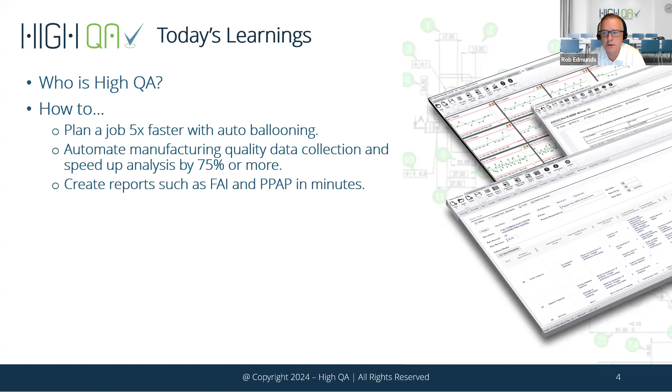We'll demonstrate how we can automate data collection, so getting those inspection results in real time. So now you have the ability to analyze all of that data quicker. Bottom line, it's real time, so it's at your fingertips. And then lastly, of course, we've got data back in the system, let's be able to report against it. So whether it's an FAI or a full submission packet, we're going to show you how we can save significant time getting that reporting out.

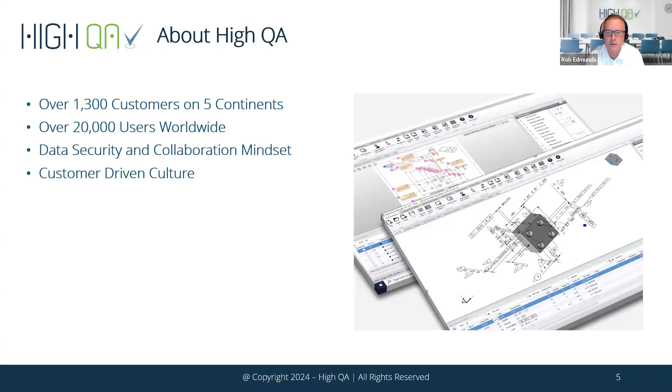A little bit about High QA: over 1,300 customers globally, over 5 continents. We have over 20,000 users. Big thing for High QA is data security, but also with that, having a collaborative mindset. So let's break down some walls. Let's pull manufacturing and quality together. And then lastly, we're realists. We understand your success is our success. So we do have a customer-driven culture.

High QA is really reimagining quality manufacturing management. So pulling a system into an all-in-one database where you can plan your quality, you can capture inspection results and then report against it. And with all of that, that ensures that you're on time, on quality, on budget.

Like I mentioned, High QA is an all-in-one database-driven solution. So we're eliminating those silos of data that aren't connected, and we're pulling it all together into one database that in itself can also integrate with other systems you may have, ERPs, PLMs. So with no further ado, let's jump into the product and we'll give you a look-see at High QA.

Lisa, can they all see the High QA software? Yes, I can see it. Perfect, thank you. All right, let's get started.

We're going to start from a wizard. And the reason I'm doing this is it's going to allow me to establish some defaults up front for the system. And when I say defaults, we establish what are called part categories in High QA. So think of this as an area where for a specific customer or for a specific part type, I can establish defaults throughout the High QA system, whether it's simply how I want my balloons to look, colors, sizes, all the way down to what reports are required in my submission packet. So I'm setting all those defaults up front.

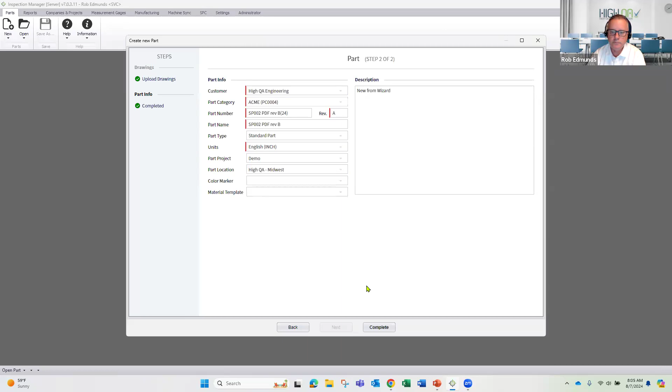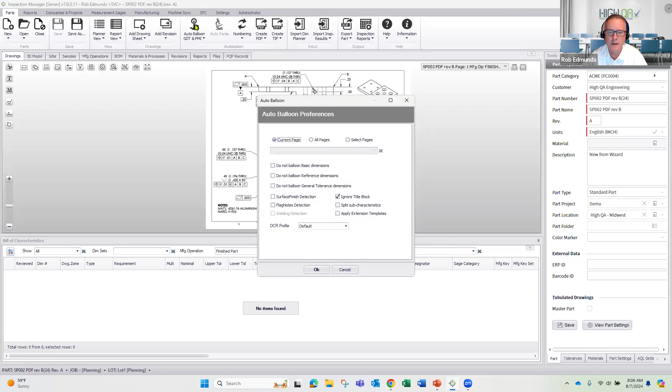All right, so I've pulled in our 2D print. We also work with 3D models, so either or. But to get started, all we're going to do is come up here and hit the auto balloon. And do note, we can handle multiple pages. If you have a packet where you need to select certain drawing pages, you can do that. You also have the ability to turn off certain things. Maybe I don't need to balloon reference or basic dimensions. I can turn those off. But we're going to hit OK.

And what that's going to do is engage our OCR. So the OCR is the optical character recognition software, something that we developed on our own. It is ours. It is proprietary. I always jokingly say it's not patented. We don't want anybody to steal it. It's the best OCR on the market, bottom line.

So once I've engaged that, it's determining the border of that picture. And then once it's done that, it's going through and finding all of the GD&T, all the features on that picture. It's ballooning it, but more importantly, it's also taking that through a digital transformation, right?

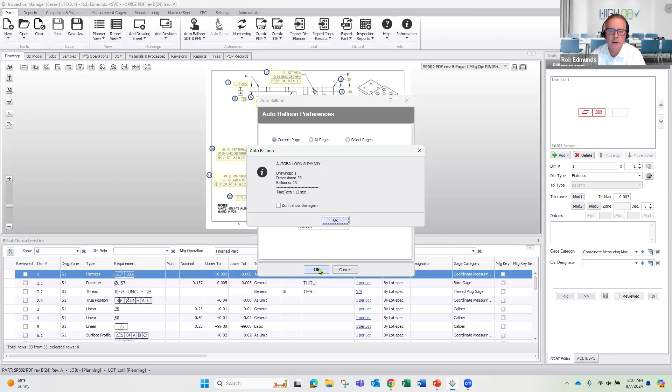So we're working with a picture, but once the ballooning process is done, now I've got executable data in what we call our bill of characteristics. So as you can see, in 12 seconds, we've got 33 dimensions, 23 balloons, and a complete bill of characteristics, right? So I now know every dimension, what type of dimension, the requirement, what are my tolerances on that dimension.

And like I had mentioned early on, I set some defaults. So one of those is my sampling rule. I've established my sampling rule as 1 per lot. And again, it could be anything. It could be AQL based. I also have the ability to establish default gauge categories based on the type of dimension. So as you can see, every linear dimension, I'm going to use a caliper.

Now, keep in mind, this is just a category. It's not the exact gauge I'm going to use. But every true position, I'm going to use a CMM. So that's all been established. Again, saving me time. I've already started to establish my inspection plan.

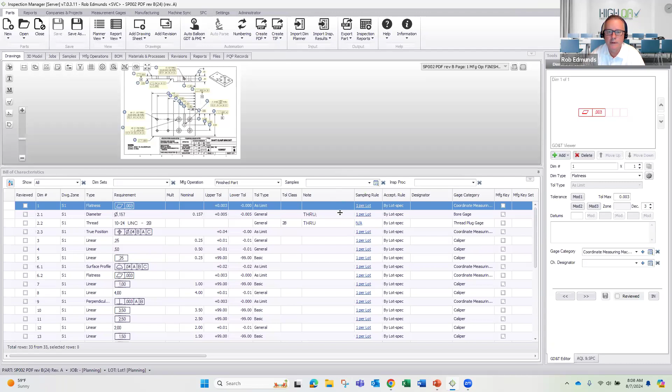Now with High QA, we provide you many tools so I can continue to use the OCR to capture additional information off of this print. So for example, when I brought in this part, it doesn't know the part number or name, it's just using the file name. But I can use these utilities around the drawing window to capture that additional information. So you could come up here and, hey, I want to extract information off my title block. I just go ahead and select that utility, and then I'm just box selecting the information using my mouse, and you'll see things update over on the right.

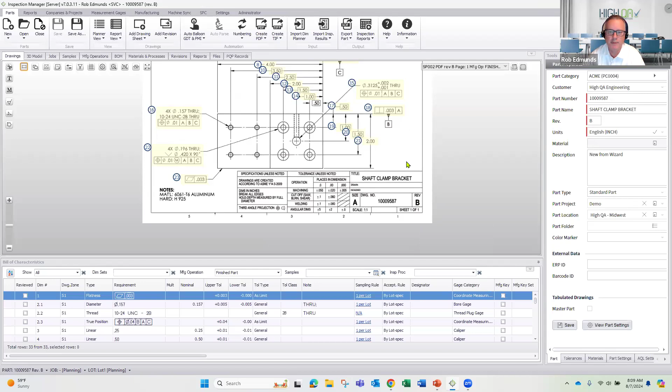So now I've got my part name. I can come in here, let's grab the part number. Let's even grab the revision. So the nice thing about this is not only am I getting the information in quickly, but I'm also getting it in accurately. I could have typed that in, but for those that know me, you don't want me typing. I'll fat finger something, then we've got incorrect data in the system.

For those of you that need to balloon notes, we provide you utilities so you can do that. Now, by default, we're not going to auto balloon notes because there's no standard around notes. So we give you this utility so you can simply come in, you box select your note, and you'll see it parse the information over on the right. But it also is now included in my bill of characteristics, and it's in there as a pass-fail. So it's going to be on my inspection plan.

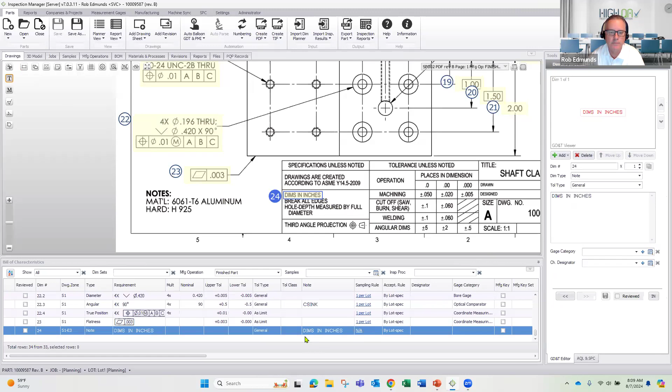For those of you that need to track material, we also provide you utilities so you can capture the material requirement off the print. And again, just box selecting the information, and you can see it now changed over to my materials and processes. So now I have my aluminum requirement in the database. Now, anytime you see a pencil within High QA, it just gives you the ability to drill in to where I can add additional information. The material code, maybe I've got a spec number. Maybe I want my supplier.

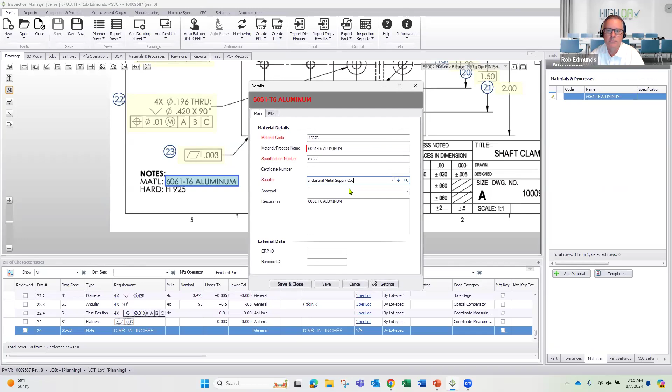But more importantly, how about being able to upload the material cert into the database so it'll flow to my reporting? I've got a sample material cert here. Let's go ahead and get that into the database.

All right, I already bragged a little bit about our OCR. Let's pick on one of these. So as you can see, Balloon 16 has 3 different callouts, right? It's got diameter, thread, true position, and you're seeing that in the bill of characteristics, diameter, thread, true position. But also there's a multiplier, right? Because there's 4 holes, and you'll see that in the bill of characteristics as well. So at the end of the day, we're looking for 12 results, right?

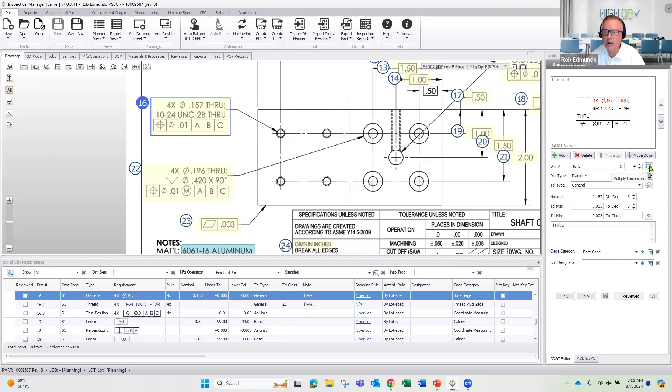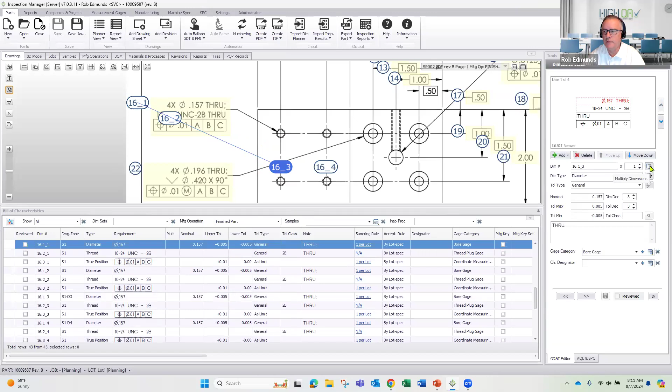Now, for those of you that run into a scenario where, hey, your customer needs you to identify each hole with its own unique balloon, we have that capability, and all I need to do is multiply out the dimensions. And now I have unique balloons, so I can identify each individual hole. And you'll see down in the bill of characteristics, now that we've done that, now we have all 12 lines. Okay. Now, for those of you that have that requirement and the print has 50 balloons, I apologize, because that becomes a very busy print.

All right, a couple more things to jump through here. For those of you that get drawings in a unit of measure that you don't want to work in, say I want to work in metric, but I'm getting this print in inch, right?

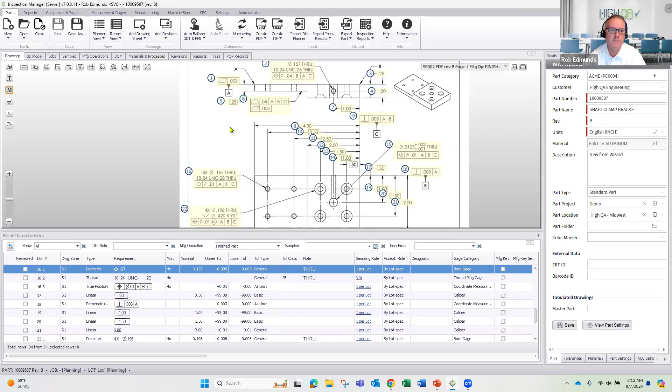Which is the default that was established before I ballooned the print. Well, if I need to see this print in metric, it's just a matter of clicking on the opposing arrows. Now the print is in metric, right? So I do have the ability to toggle between the units of measure. I can establish a plan in one unit of measure, collect the results, and then toggle back to the customer's unit of measure that they provided.

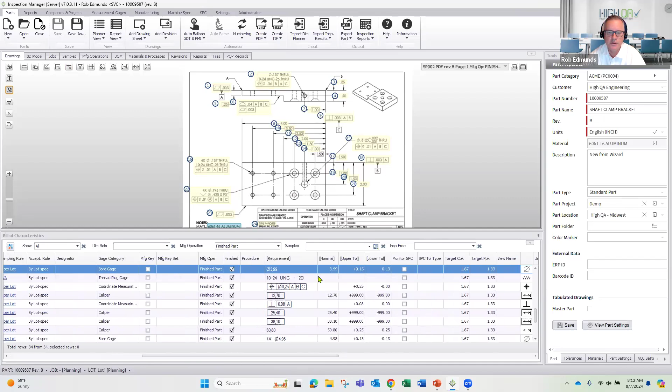And again, that's not smoke and mirrors. It's not doing the calculation when I hit the button. Actually, if you remember that first, whatever it was, 15 seconds when we ballooned the print, here is the default, which is an inch. But if I scroll over in the bill of characteristics, the conversion was already done, right? So there it is in metric.

All right, so here's another nice feature, right? We'll never claim we're going to be 100% on ballooning prints. Prints get busy, things get stacked on top of each other. The human eye has a hard time figuring it all out. But we provide you a utility called whiteout balloons. So when I click on this, it's going to eliminate everything I've captured, right? If I hover over, you're going to see them.

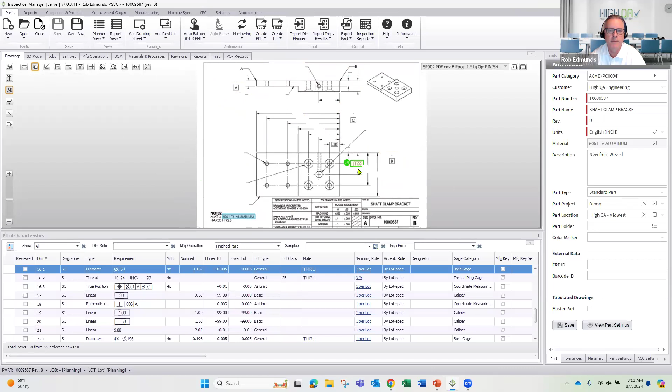But now I can easily identify, hey, we missed this dimension. And it's just a matter of grabbing the snipping tool. And now I can come in and I'm just going to box select it, let the system parse it out. It's going to determine, hey, it's linear, it's a basic dimension, 0.5. Perfect.

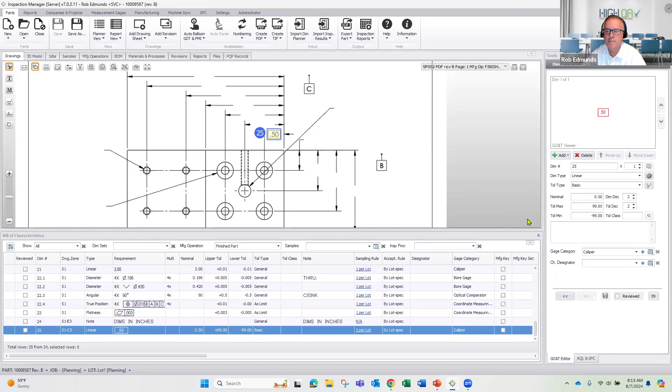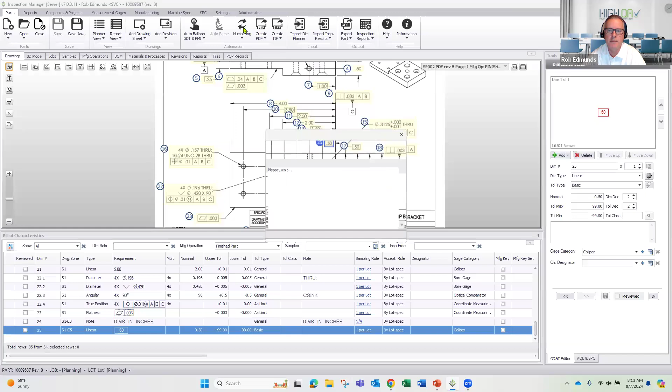But for those of you that maybe manually balloon today, this is probably one of your worst nightmares, right? Because now I go from 13, 14, 15, 16, 25, 17, right? I'm out of sequence. But with HighQA, very simple, just come up, click on the numbering, it'll renumber and put it back in sequence.

Another thing to note within HighQA, we talked already about a default gauge category, but you can also establish characteristic designators within the system. So let's say this balloon 22 is a key characteristic or a critical quality, right? We'll call it a CTQ. So when I hit save, a couple things are going to happen based on rules that I've already established in my system. So one of the things is I have my balloon simply changing to a triangle. I want it to look different on the print. It is a CTQ. Let's pay attention to it.

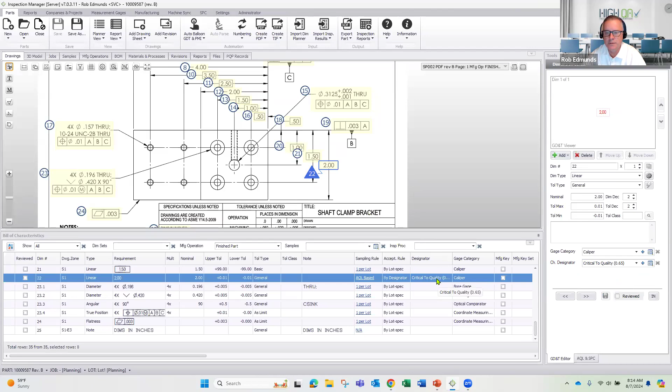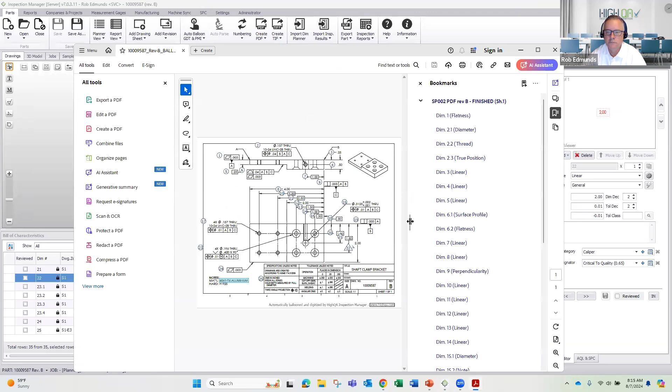But also notice down here, now that it's been established as a CTQ, I've got a rule that says anytime I have a CTQ, change the sampling plan to be AQL based. So those two things happened automatically. So that simple, guess what I've got now? I've got a ballooned print, but I also have the ability now to create my inspection plan.

So I know every dimension, the requirement, the tolerances, what measurement tool I need to use, and even the ability to capture actuals within this inspection plan and re-import them once it's done. So that would be the most basic way to get results back into HighQA, but we're going to talk more real time as we move through this demonstration.

All right, really quickly, I want to jump into our gauge management. So gauge management is in the core HighQA system. Of course, we're going to track all the information you would expect, right? All the gauge information. We do have the ability to track location of gauges if you're using our shop floor data acquisition interface that has check-in, check-out capabilities.

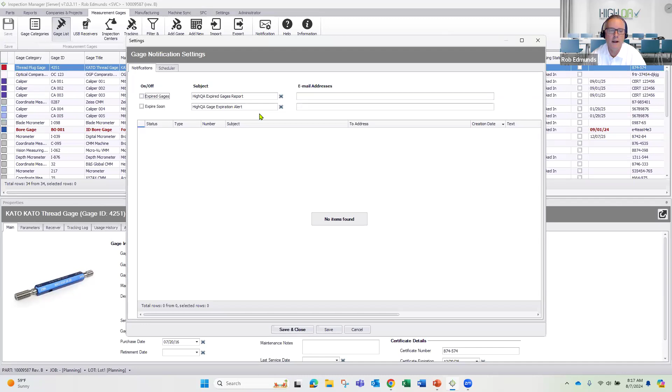All right, let's jump back over here. And I'm sure many of you do in-process inspections. So that's where we're going to go next. I'm going to go into an area called manufacturing operations. So all these different dimensions are associated with the finished part, but this is where I could start breaking things down into different operations, right?

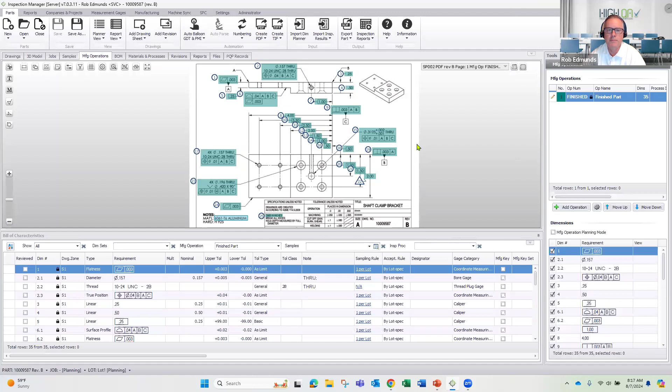So let's say I'm starting with my block of aluminum and I'm going to rough out that part. That's my first op. So I'm going to come in here and I'm going to select some of these dimensions. Let's just grab some of these overall dimensions. We'll grab the height here, and we're going to add an operation. So now I can come in and say, hey, this is my roughing op.

Now, for those of you that are doing submission packets like a process flow, a PFMEA, control plan, this is where we can start associating the process to the operation. And those reports will now be dynamically generated based on the choices I'm making, right? The reports are already established, but now I'm going to dynamically populate them through these different steps in my planning process, right? So I'm going to go ahead and I'll grab my roughing process.

Now, within HighQA, we have what is called a process library. So it'll define all the different processes in your organization, but also it'll maintain the failure modes for each one of those processes. So we've templatized that. So as I start building this out, my process flow, my PFMEA are all getting populated based on these choices I'm making. Let's grab a couple more.

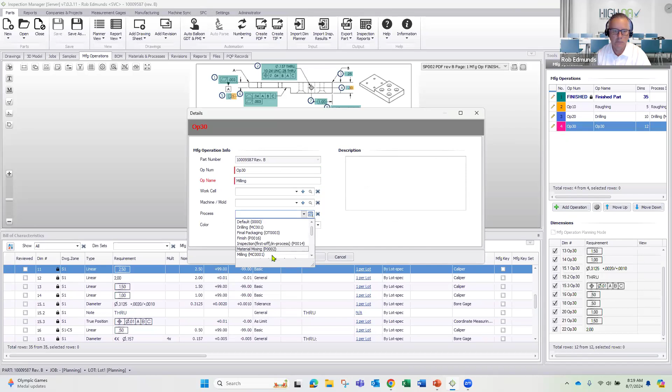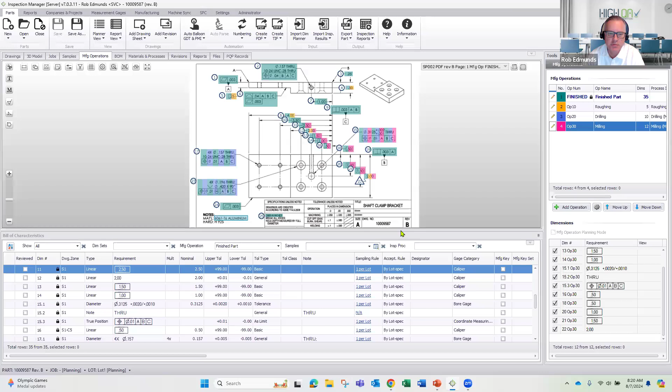All right, so now we've got our Easter Bunny print or Candyland print, whatever you want to call it. By the way, you do have complete control over the colors, but we've got our 3 different operations established. Well, let's do this. Let's take it a step further. Let's go back to that roughing op. So now I've got a print just for my roughing op, and there's the 5 dimensions that I want to pay attention to. But also note, my requirement here is associated to the finished part.

Well, this is a roughing op, and I'd like to leave a little bit of material. So with High QA, I have the ability to come in and let's just grab all these and do a bulk update in which I'm going to say, hey, I want to, I don't know, add 3% to my nominal. And let's even open up the tolerances. Let's say we want 50 thou and minus 50 thou.

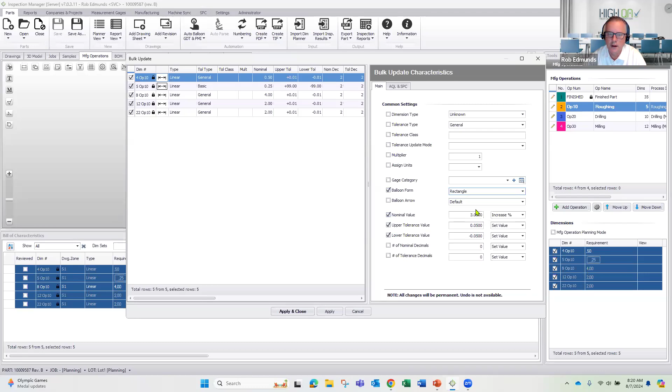And just for kicks and giggles, every roughing op, I want to use a rectangle as my balloon shape. We're going to go ahead and apply that. So now I've created an inspection plan for my roughing op in which my nominal values have all been increased by 3%. So I ensure I leave a little bit of material, and my tolerances have all been opened.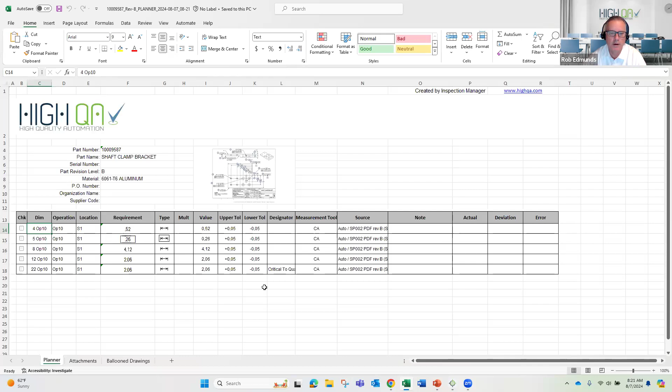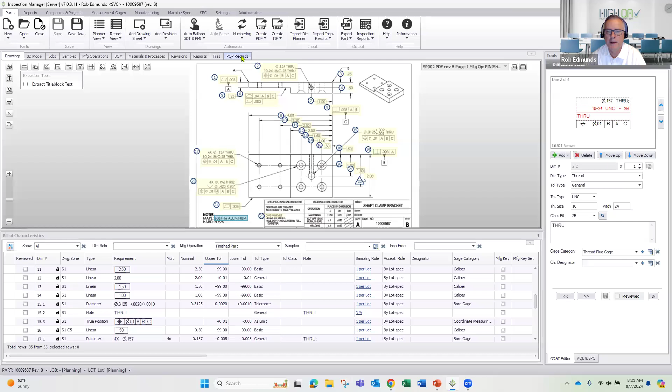All right, hopefully everybody's following. We're going to leave manufacturing operations, and I want to jump really quick into submission packets in our PQP. Right, so your PPAP submissions. Let's go ahead and jump in here, and I'm going to create a job. Let's call this, and we're going to make, I don't know, we'll say 100 of these. And notice we're going to automatically create those PQP documents.

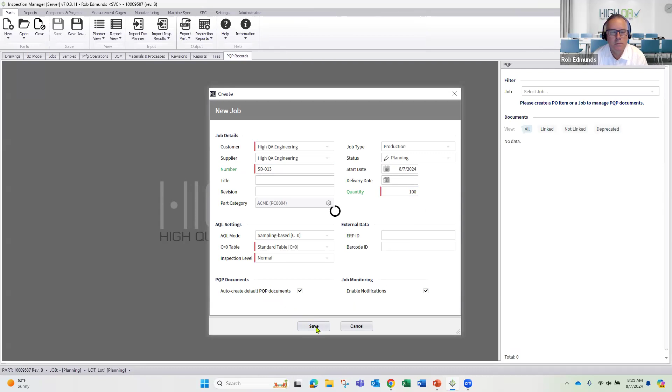So based on the part category I had chosen, these are the reports that are required for my customer, right? I have a process flow, a PFMEA, a control plan, and ultimately my FAI. So let's take a look at that process flow. I had mentioned, as we're starting to do our planning, that these reports are dynamically being populated, right? So you can see I've got now my roughing, drilling, and milling.

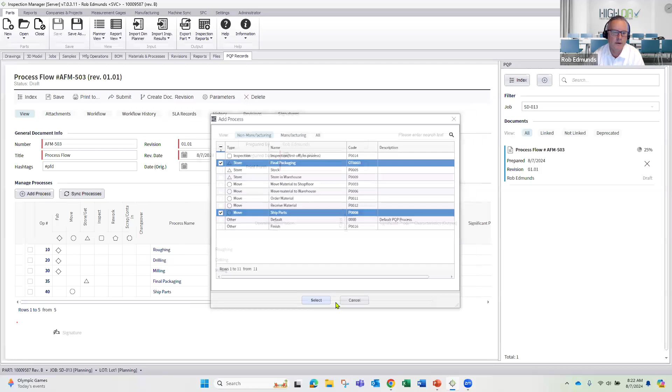I also have the ability to come in and, hey, let's add maybe some non-manufacturing processes. Let's say we've got final packaging and we're going to ship parts. Let's go ahead and add those. All right, so just like that, process flow is in place. Let's go back to our index, and do note, I could have had my PFMEA created, my control plan created, all of that could have been done.

But for demonstration purposes, I'm going to walk you through how we build these out and let you see what's behind the scenes. So we're going to go ahead and create our PFMEA, and it's a nice little wizard that's going to walk me through building out that report. Now, one thing to note, if you see my process flow has a serial number, well, that's going to be tied to my PFMEA and my control plan. Reason for this is, should something change in one of those reports, they will be synchronized, meaning you're going to get alerted that, hey, I need to update this report because something changed in one of the other reports.

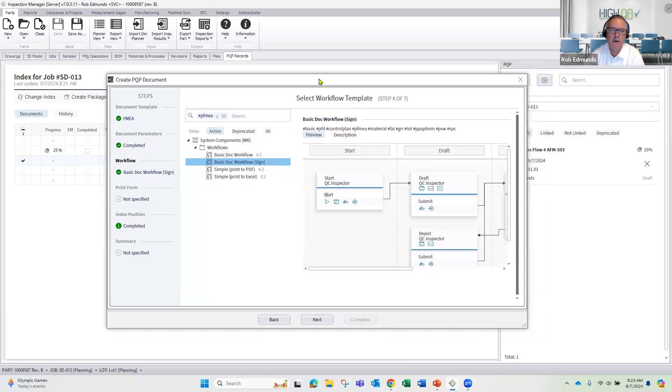Go ahead and hit next. The other nice thing about the PQP is all this reporting is driven by a workflow, and it can be anything you want. I've got mine set as just a basic workflow with a digital signature, right? So my inspector is going to go ahead and put together a report. They submit it. The quality manager either signs off or sends it back to the inspector: hey, you need to do some of these updates, get it back to me. Ultimately, I approve it, and now it's ready to be submitted to our customer.

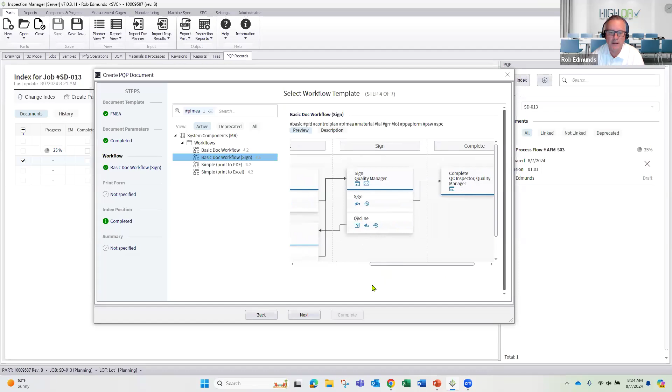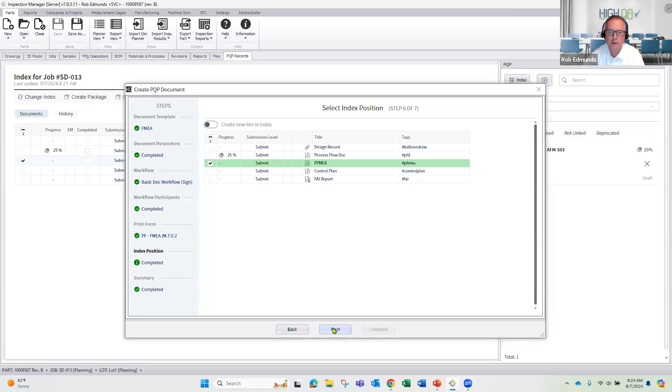You also have the ability to assign individuals or teams for these different reports. And again, I don't have to do it right now. I could come back after the report's already been established. Let's go ahead and get our PFMEA all set up. So in a matter of a minute, I've got a PFMEA. So every one of my processes, my failure modes, and you know it, right? So this is all driven from that process library where we've templatized things. But if I need to make a modification now that it's at the job level, absolutely can do it. Maybe this is an 8 and it'll automatically calculate.

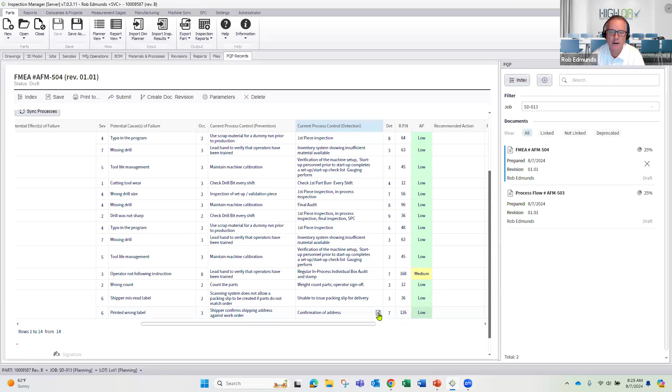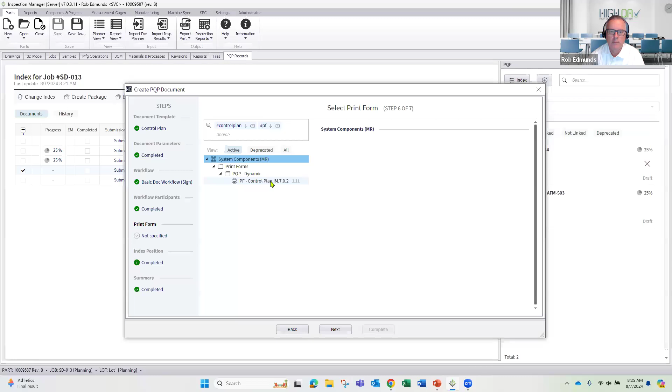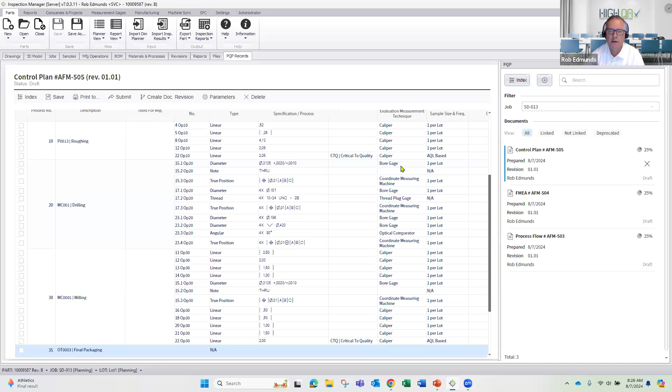This is why this is my favorite, right? We went through and we defined those different processes and the dimensions associated with them. So now I can see, hey, my roughing operation, there's the 5 dimensions, one of them being a CTQ, my measurement technique in place, my sampling plan in place.

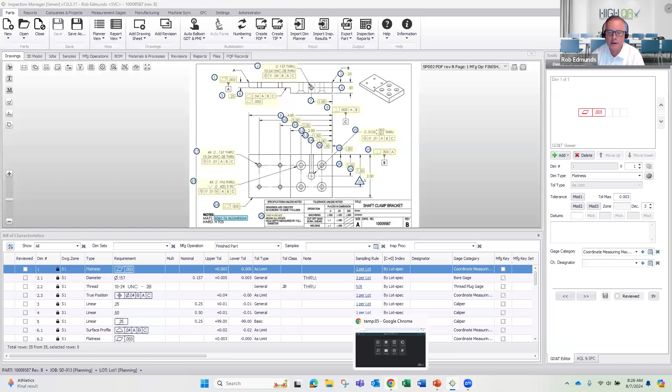All right. Guess what? Last thing we have to do is let's get an FAI out, right? But to get the FAI out, we need to capture some results. So let's talk a little bit about how we go about in HiQA capturing results real time, which ultimately saves you time, right? So one of the methods we have is through our shop floor data collection interface. Let me get logged in here. So this is meant for any kind of manual measurements, right? So, hey, I've got to measure this. I'm using a caliper. Let's get the results in.

A couple things to note. If you have barcoded job travelers, we do support that, right? Makes it easy for the inspector to log directly into the job that they're wanting to log into. This is the gauge area where I can come in and check out gauges, right? So say I need a caliper. Well, here's all my calipers. I'm going to go ahead and check this out. And because we're database driven, it knows a lot of the information already, right? I simply have to say, where am I taking it? I'm going to go ahead and check it out, take it to the inspection lab.

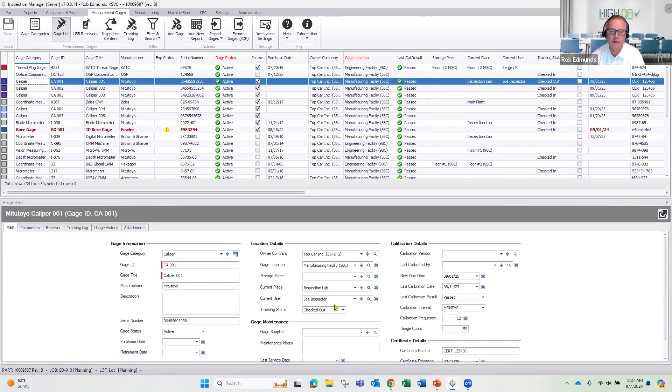Now, again, all of this is real time. Somebody logs in, hey, they wanted caliper 1. Well, Joe's got it. Same goes for if I go into the main system and we go into our gauge management. And if I go to caliper 1, we can see Joe's got it in the inspection lab. So again, all real time. Joe gets done with it. He's checking it back in, returning it to storage, and we're all set. All right, let's log into that job we're working on.

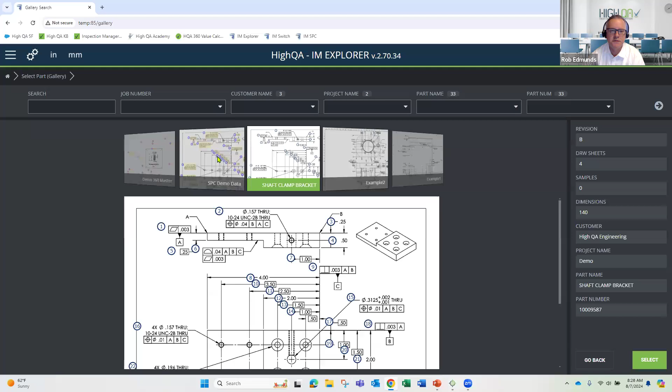And again, this is also where people that have seen my demos in the past, they love this because I get to make fun of myself. Anybody looking for a Journey Escape album, they remember the first generation iPods. We have that functionality right there for you.

But let's go ahead and log into that job we're working on.

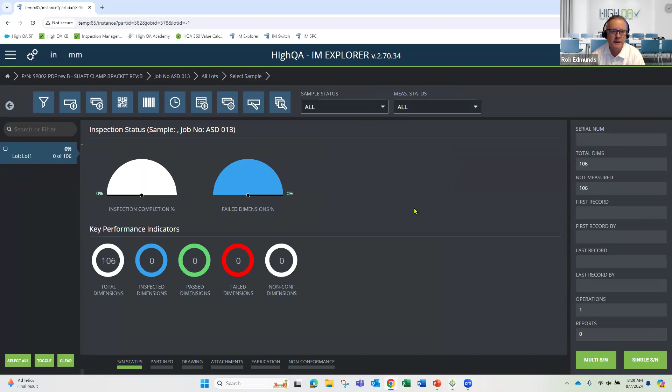And you can see a nice little dashboard. Obviously, we haven't inspected anything. So let's jump into that job. And it immediately takes me to the finished part. But hey, I'm working on the roughing op. So let's go ahead and change over to that roughing operation in which there's those 5 dimensions that I need

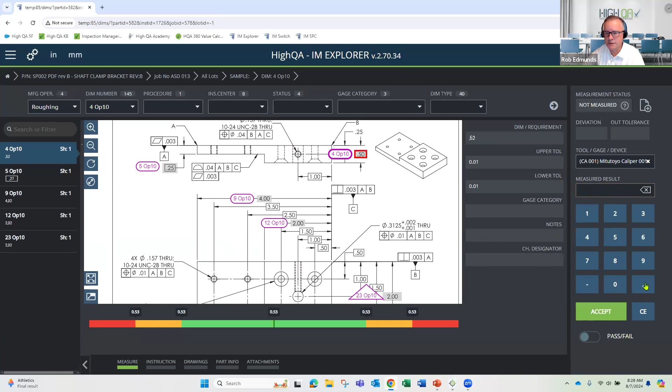to measure. This is another time to mention we do support wireless gauges. So if you have any Bluetooth wireless gauges, this is flashing orange because it's listening for input. But I'm going to do it the old school way, and we're going to enter our value, hit accept, and it's real time, right? So I get real time feedback. Turns green, green's good, moving on to the next.

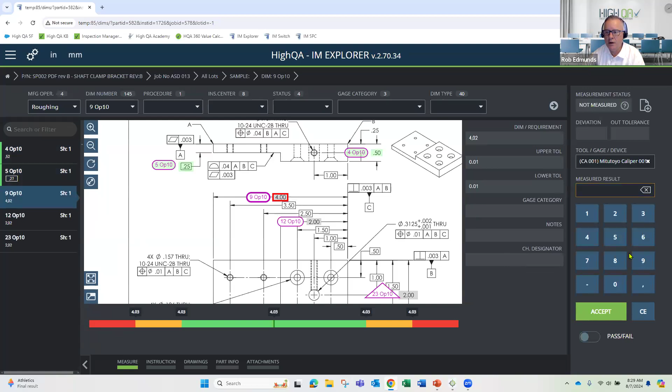Now, if it was say a snap gauge or a go/no-go, that dimension would come looking like this, to where I can simply say, hey, it passed, hit accept, and we're moving on to the next. Now, should I enter a bad value? It's going to immediately prompt me, hey, wait a minute, this is out of spec. So do note, the result hasn't been saved yet because it's giving me the opportunity to measure it again. But if it truly is bad, I can go ahead and keep it failed.

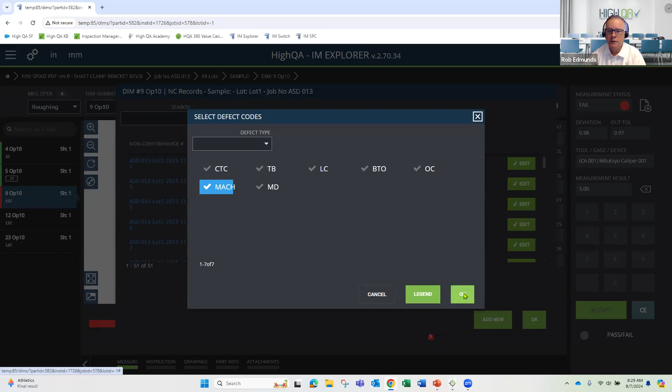And now at the point of failure, I can initiate a non-conformance, right? To where, hey, it's scratched. And of course, this would default to your defect codes. But just like that, I've initiated a non-conformance. And like the notifications we have in our gauge management, we have those around non-conformances as well. So whomever needs to be notified, they're alerted that, hey, this part on this job, this dimension just failed.

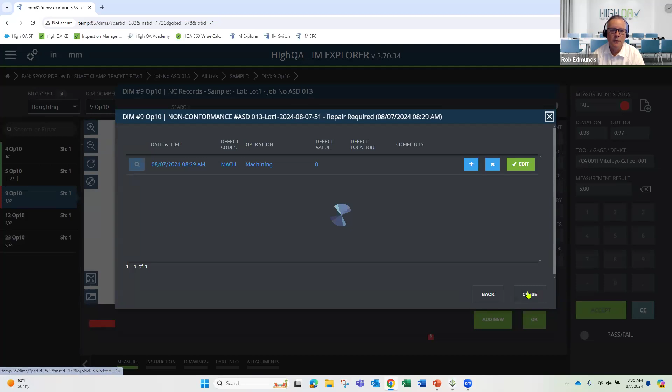All right, so that's one way to get data into the system in real time. Another way to do it is through what we call automatic machine data import. So for those that have, say, CMMs, VMMs, FaroArms, whatever it may be, any kind of measurement device that runs on software that will output a results file, we can automatically pull that in.

I'm going to try and get the Zoom meeting thing to go away. It won't go away. So I can get at my buttons. All right, bear with me. I got to skinny this thing down to get at my buttons.

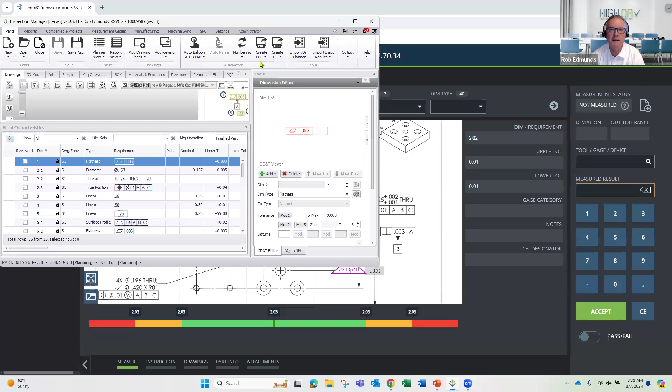All right, we're going to go into machine sync, expand this back up. So for every one of your CMMs, VMMs, whatever it may be, we're going to establish a folder on your network. And that folder is where the results file is going to go. And all we're doing is simply listening for results to hit that folder. As soon as they do, we're going to go ahead and import that data. So we'll have the results coming in.

It's a background kind of routine. Doesn't require anybody to do anything. Your inspector is going to simply run the part on the CMM. It's going to measure all the features. The results file goes to the folder, and boom, it's coming right back into HighQA.

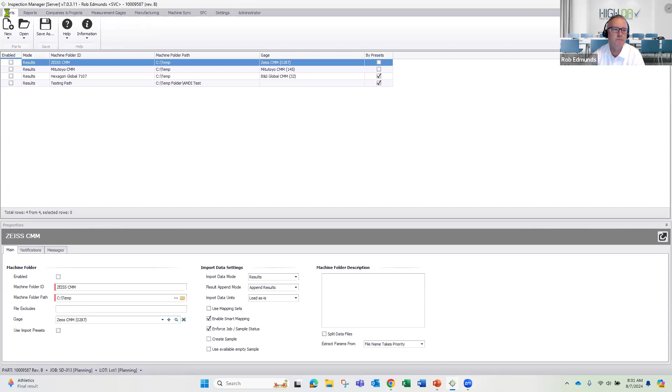All right, to simulate that though, I'm going to manually import some results. And I have kind of a mock-up CMM type report that I'm going to pull in. So we're going to come in here and just from a file, I'm going to import some results. And you'll recognize this for those that have those. I mean, very standard, comma delimited type file, all the different features and the results that we captured. So we're going to hit import.

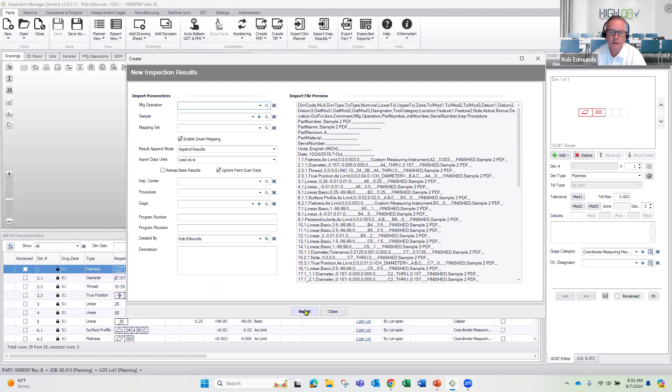And by doing that, data is going to come in, and now I've got visibility of how we're doing on this part, right? So green's good. We already talked about that. Now, gray means I don't have results, right? So looks like we've got our diameter. It passed. We'll go to the next. Oh, we haven't done our thread. Well, the thread's not going to get measured on my CMM.

So this is another way I can get results into HighQA. I can say, hey, it passed. And oh, by the way, I used this specific gauge. Hit save. Green's good. Now, pink is unique. Pink means, hey, you've got results in here. It seems valid results, but something's off. Well, we have what is called results mapping in HighQA.

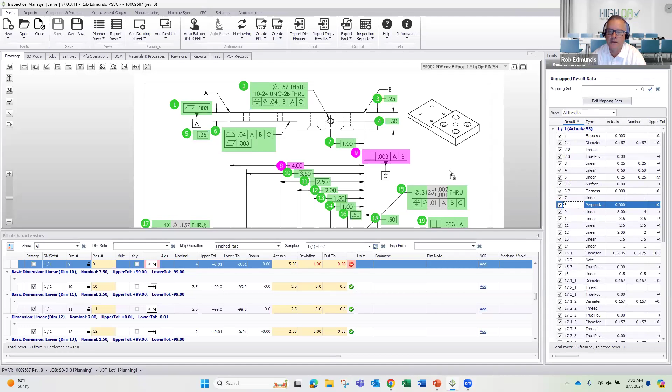Let me grab all my results here. And if we look at dimension 8, the results said it's supposed to be a perpendicularity, and balloon 9 is supposed to be a linear. Well, they're just flip-flopped, right? So this allows me now to reassociate those results with the correct dimension. So I'm just dragging and dropping and associating those dimensions with the correct balloon, right? So balloon 8 failed. Let's take a look at it.

Why isn't it jumping? Come on, play nice. Oh, bear with me. Results editor. Yep, 5 inch, it was supposed to be 4 inch. Yep, it was a failed feature.

But now that we have results in, let's go ahead and produce that FAI. So we're going to jump back into our reporting. And as you can see, you can have as many different types of FAIs as you need. I'm just going to simply do an AS9102. We'll go ahead and quickly get through this. You've all seen this.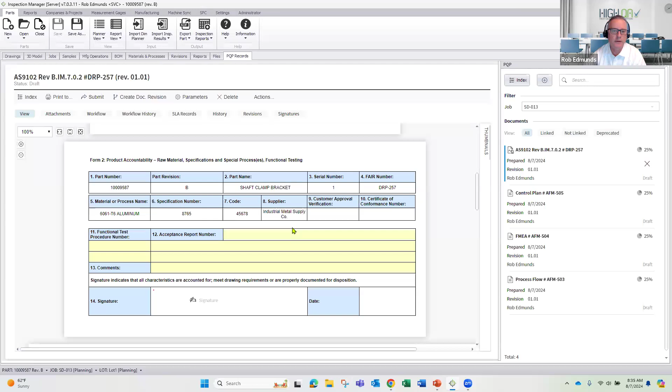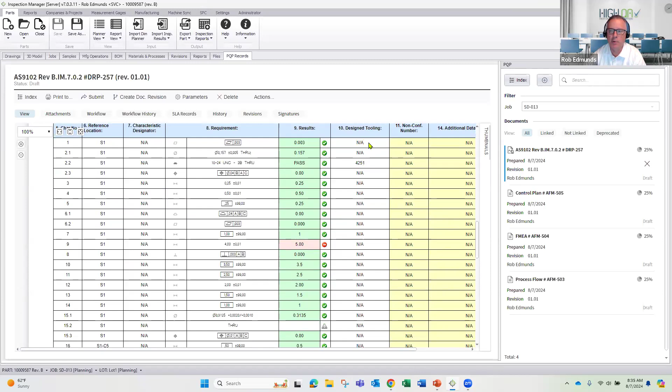There's my form 2 and the material we pulled off the print. All the way to my form 3, the failed feature. There's the exact gauge I used for passing that thread that I inspected. Now, if my CMM report would have had the associated CMM, that would have been established in the report as well. That report simply just didn't have it, which is why it's NA. But just like that, I've got an FAI put together.

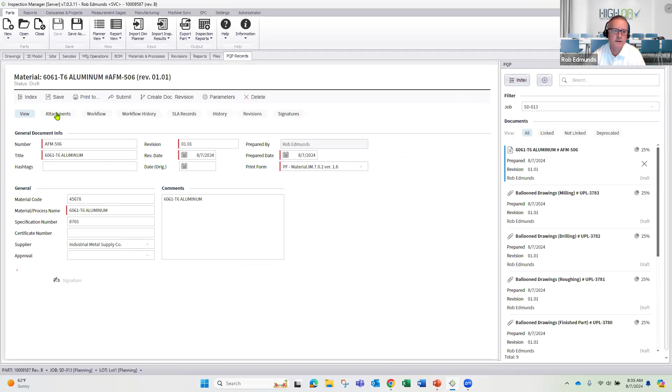And another thing we'll want to do at this time, right? We're putting together our final submission packets. Let's go ahead and sync materials and drawings. So we'll have our balloon drawing as part of the packet, as well as the material, all the way down to, right, I've got my material requirement. And if you remember, when I established that, I also attached the material cert. So that's been embedded.

Now, because we have that workflow, it really acts almost like project management for your reporting. You can see I've got a 25% progress, in which my inspector or whomever's in charge of these reports needs to get them submitted to the quality manager for you to sign off. As soon as we hit 100%, meaning everything's been signed off on, we can go ahead and build the final package, which will consolidate everything into a single PDF, all the reports that are easily submissible to your customer.

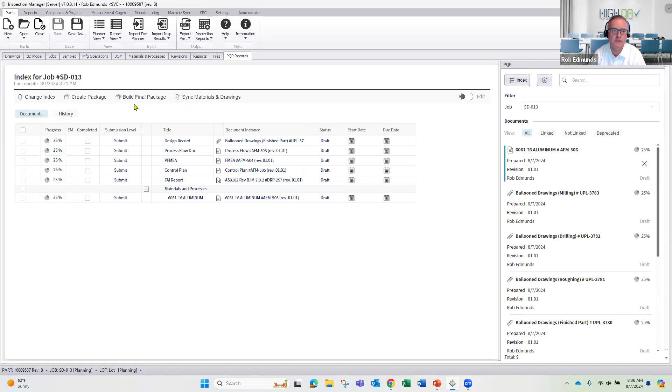I wanted to come back to one thing I forgot to mention in gauge management. It's a big part of High QA, and the reason we have gauge management as part of our core system is for every gauge, we track usage, right? So for this gauge, I can see every part number, job, lot, serial number, all the way down to the dimension it measured, whether it was good or bad, including date and timestamp and who did the measurement.

So it plays a huge part of traceability, but also keep in mind little things like a dropped gauge. I used this gauge, I checked this feature and it failed and I don't believe it. So I grab a different thread gauge and sure enough, it was good, right? So let's do the tiebreaker, grab a third thread gauge. Yep, it's a good feature. Oh, nuts, I've got a bad gauge, right?

Well, when was the last time that gauge measured something good? High QA can easily research that and get right to it, as opposed to, I'm sure many of you have run into it, digging through different work orders trying to figure out when was the last time that thing measured something good.

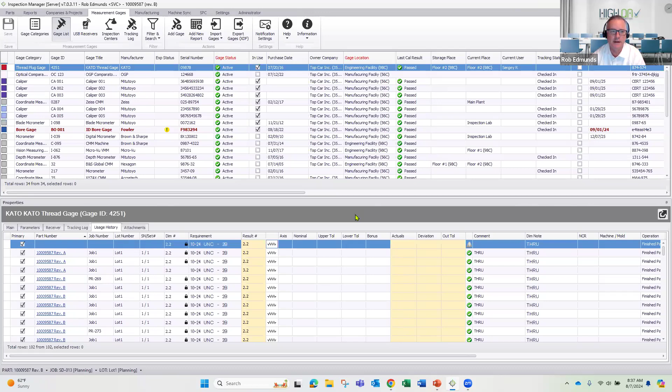All right, that's the end of the overview demonstration. So let me jump back into the PowerPoint, and we're going to cover a couple more things here.

So again, High QA, as we evolve the 360, currently we are strictly on-prem, but we are going to move to a cloud-based system as well. So next year, you'll be hearing about High QA as a SaaS model. But do note, everything's based around security. So it'll be hosted in AWS GovCloud. There will be end-to-end encryption, as well as obviously ITAR compliant. So many of our customers are ITAR compliant. We have to be that way. So it's at the foremost of our thoughts, ensuring that.

The other big release will be our supplier quality. So picture being able to plan out a job, pass it on to your suppliers. Basically think of it as now your suppliers are an extension of your own shop floor. So more to come on the hub side of things.

The other thing I mentioned a little bit about is being able to integrate with other systems. So High QA does have a RESTful API that allows you to integrate with any other software that has an API. So whether it's an ERP or an MES, whatever it may be, we have the ability to integrate to your existing systems.

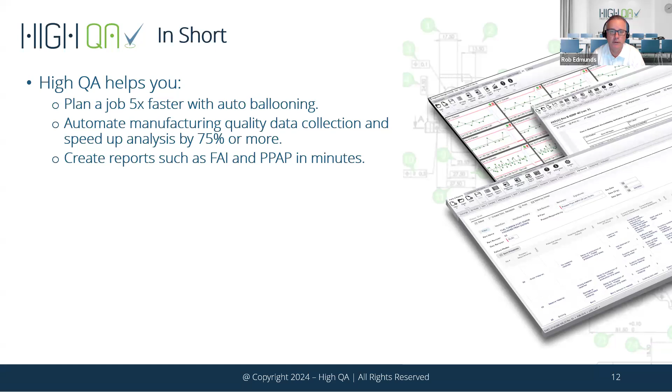But also being able to capture your inspection results real time. Let's get those results back in so now you can assess things and understand, hey, how are we doing, right? Where can we improve? Let's capture failed features early in our process as opposed to at the very end. And then of course, once we've got results into the system, once we have that data, let's do a PPAP submission in minutes rather than, for many of you, weeks, right?

All right, Lisa, that's the end of my show. Hopefully I did okay time-wise. Didn't burn up all of our time. Perfect. Thank you so much, Rob. Okay, let's get started. We did have a couple of questions come in while you were presenting, so let's take a look.

Good. Let's see, the first one says, do you offer service in Spanish? So I know our 360 product, when it gets released, will be in Spanish. The one thing I can say is all of our support, so whether it be our High QA Academy courses, which are online courses that provide you the foundation of how to use High QA, that is available in Spanish. We also have one of our professional services reps who is fluent in Spanish. In fact, he spends a portion of his time in Mexico. So we have that available to you as well.

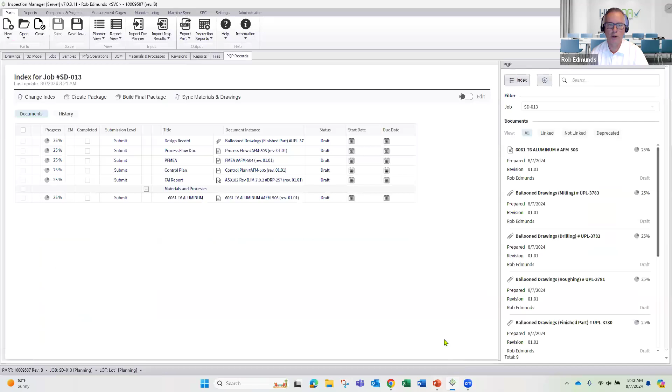Okay, great. Here is another question. It says, where are you getting all of the tolerances from? Yeah, so let's do this. Let me jump out. So if the feature on the print itself has a tolerance, that is what we're grabbing. But if the feature doesn't, say a basic or reference dimension, right, we're going to what we call a default tolerance table. Let me get back to my core drawing here.

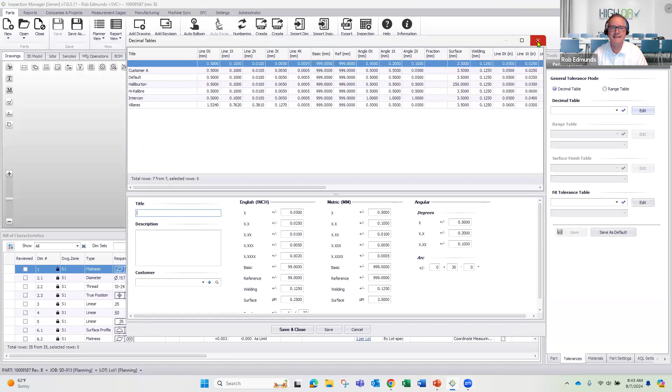So where that is established, and all of this is in place before I went ahead with ballooning, is I can establish my default tolerance table. And you can have as many as you want. You can see here I've got customer specific tolerance tables in place. It could be even part specific. So very easy to establish those tables. And again, that's something that's done prior to actually ballooning the print.

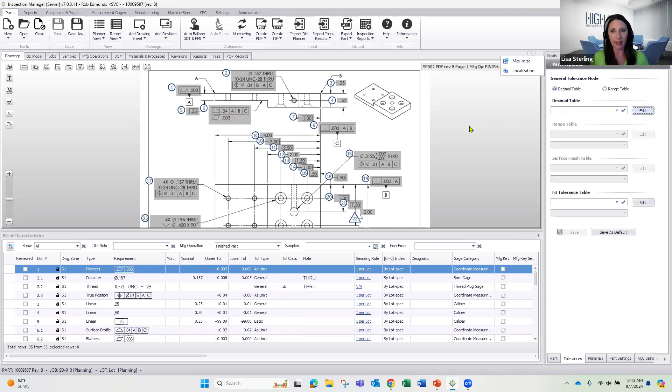More questions? Okay, here's another one. We currently manage gauges in Excel. Do we have to enter all of our gauges into HiQA manually? Thankfully, no. For those of you that do that, do note, built right into the HiQA system is the ability to import gauges, whether it's from Excel or even an undefined format where you can map to the corresponding headers within the HiQA system.

Okay, perfect. It looks like there's just one more question, and we'll go ahead and conclude with that. It says, how long does it take to get up and running on the HiQA software? Ooh, loaded question, Lisa. That's loaded. Let me say this. Within a week, you could be auto ballooning, but the reality is, depending on how much of the HiQA solution you're going to implement, on average, I would say give yourself 3 months. 90 days, no need to rush, no need to panic.

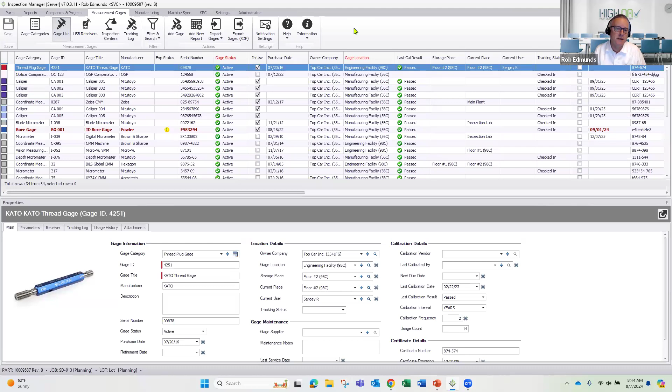You've already got a day job. Now you're taking on this additional task, but it really is based on your resources. We can move as fast as you want, but what I always tell people when they ask that question is, hey, give yourself 3 months and you'll have the system up and running and everybody fully educated on how to use it so you can immediately start benefiting from saving time.